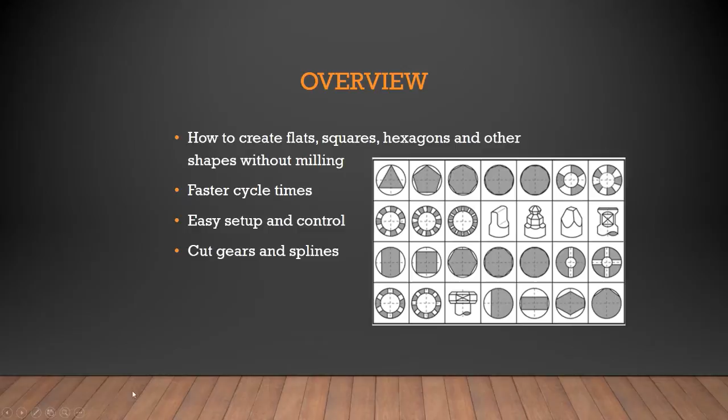And kind of a polygon turning 101: the things you want to start with is, number one, you've got to realize that the best ratio for polygon turning is a 2-to-1. That means the live tool is running twice the RPM of the main or sub spindle, synchronized together. So in other words, you have the live tool running, say, at 1,000 RPM. And when you go into this mode with the 2-to-1 ratio, the main spindle then would turn only at 500 RPM.

Number two, what you want to do is be sure to select a polygon cutter that is made especially for polygon turning. There are many manufacturers out there that are providing polygon turning tools, and we'll get into that in just a moment. Number three is the program, and in the program what we want to do is program the surface feet per minute and the feed similar to finish turning.

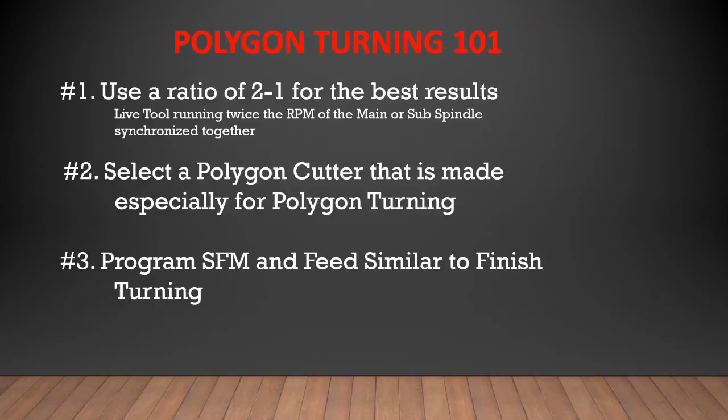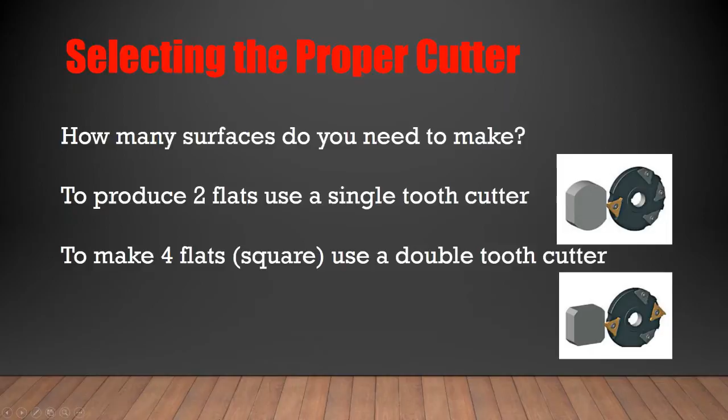So in selecting the proper cutter, first we need to know how many surfaces we need to make. So if you look over here, to make 2 flats, we would use a single tooth cutter as shown here. To make 4 flats, we would use a double tooth cutter. And remember, this is with a 2-to-1 ratio. To make a 6-sided hexagon, we would use a 3-insert cutter. And by the way, all Eurotech machines are equipped with the polygon turning function as standard. So the most common or widely used polygon turning is making hexes.

Over the last, I'd say, 10 to 15 years, there's been a big move over to this, especially in the areas where people are doing things like connectors. A lot of connectors will have a hexagon in the middle of the part, let's say. So the old-fashioned way is that we would throw in hex stock or purchase hex stock and then turn the majority of that hex stock away just to leave a hex in the middle of the part. So now with polygon turning, more and more people are getting away from that method and going to round stock, which runs much better in 12-foot bar feeders. And probably most of you already have gone through that.

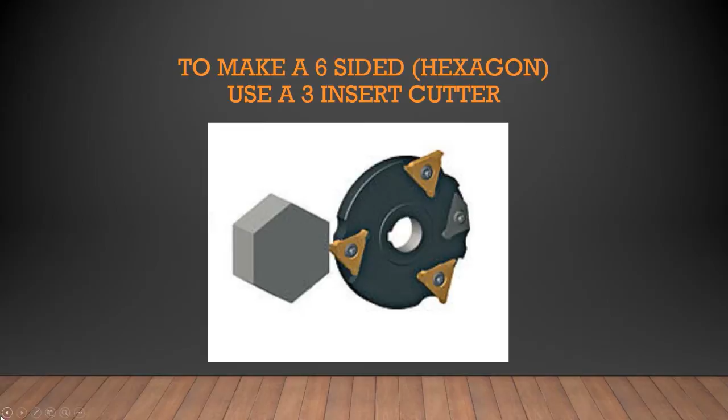And not only does it run smoother, but in some materials, round stock is less money than hex stock. And by running the round stock, we remove the material we need, and then we just come in, say, in the middle of the part where we need to make the hex, and we can use polygon turning to do that. So it's a valuable resource or function to have on a machine.

There are many good suppliers of polygon cutters, as I said before. One of the manufacturers available here in the U.S. is P.H. Horn. We also represent M.T. Marchetti. They also provide polygon cutters. There's a German company, Dieterle, and Schwanog, also another German company. All these companies are represented here in the United States.

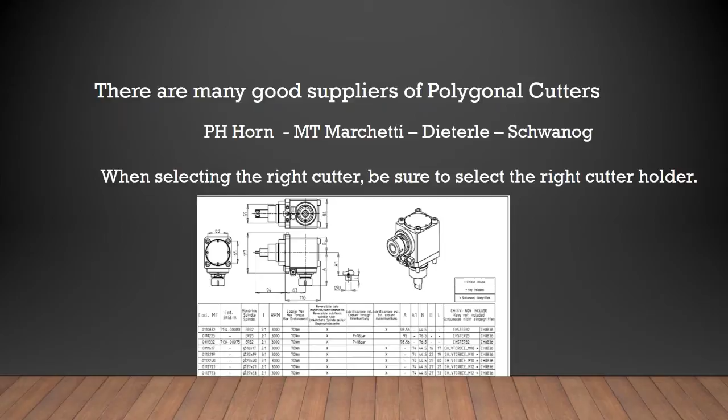But also remember that the cutter is one component. The other component is the actual live tool to do this type of polygon or successful polygon turning. Now, can a regular live tool, say a Z-axis live tool, be utilized? Yes, it can. However, this one that's shown here is a specially designed polygon cutter, and it's a little bit more heavy duty than your standard Z-axis live tool. So it's especially designed for polygon cutting, and that's the one we would actually recommend.

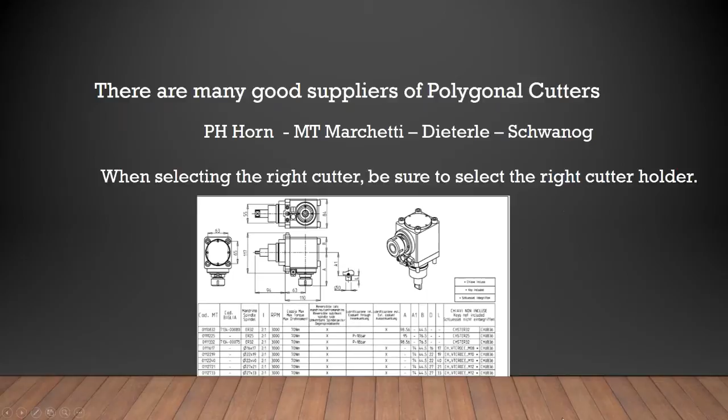So obviously, we have two sides of the coin here in successful polygon turning. We have the setup, the selection of the tools, etc., and then we have the programming. So the setup is also very, very important. Number one, we need to select the proper cutter and mount that assembly into the turret.

Now, the inserts need to be checked at least once with an indicator to make sure that each insert is at the same height. That's important because if you don't do that on these cutters, if you have an insert that's slightly out or protruding a little bit further than the others, then what are you going to get? You're going to get an uneven hex. If you measure across the flats, you could end up with some different sizes, and you don't want that. You want your hex to come out as perfect as you can. Also, it will help in the cutting.

The other thing is, realize on your setup, you're going to offset this polygon cutter off of one of those inserts the same as you would do a turning tool. So just pretend that that cutter is a turning tool, and you're going to offset it either with your probe or manually, however you do your offsets. If you're going to use the probe, bring the probe out and then rotate the cutter so that the insert can come in and touch off and take your offset there.

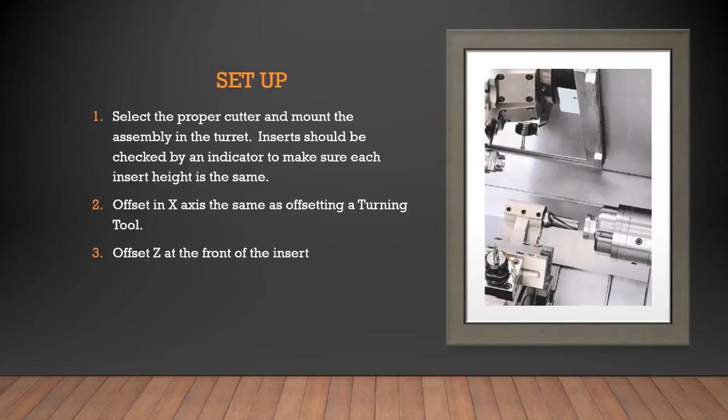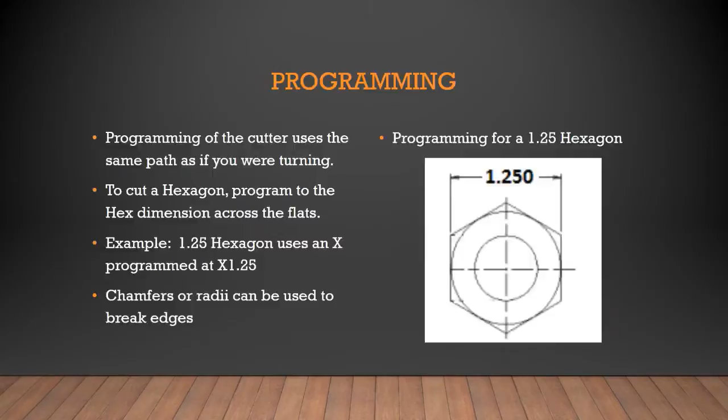Then number three, you're going to offset the Z to the front of the insert, because remember, you're going to treat this polygon cutter like a turning tool. Now here's what the program will look like. What I've chosen here is a 1 1/4 hex. So to program a 1 1/4 hex, this would be the format. We start off with a tool call, our work coordinate, coolant on, easy stuff, right?

Then first thing I'm going to do is call up the live tool. In this example, we're going to call up the live tool at 1,000 RPM, counterclockwise direction, and P13. Now this example is for one of our single turret machines. For a double turret or triple turret, that P number would just be different. For instance, on a Trofeo, that P would be P12 instead of P13. So we start the live tool at 1,000 RPM, and next we start up the main spindle at 500 RPM, also counterclockwise direction, P11.

Then the code comes into place. We're going to now command the polygon turning function, and that code is G251. The P1 is what we call declared. So every time you call the G251, you're going to automatically put in a P1. Don't forget that. It's necessary, but it's always going to be P1. And then the Q value is the ratio that you need. We said the ratio we want to use is a 2-to-1 ratio, so the Q is going to be 2. And the R value we have here is R0.

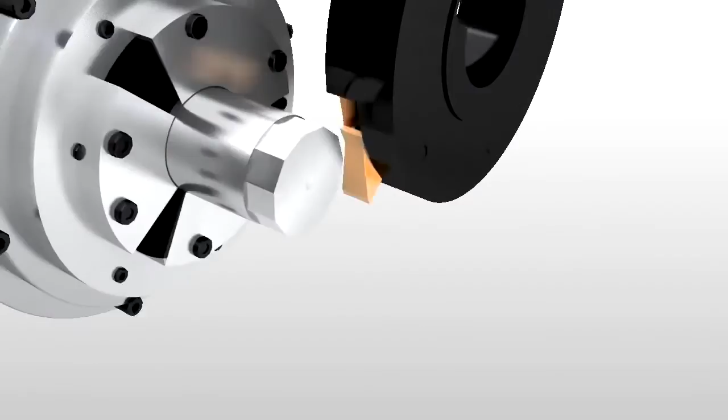Here's some notes. If you're programming for the 2-turret or 3-turret machines, like I said earlier, you're simply going to add an H1 for head 1 or channel 1 for the main spindle, and H2 or channel 2 for the sub spindle. Okay. And number 2, always check your live tool direction to ensure the proper use of the M3 or M4. Make sure the live tool you're using is rotating that cutter the correct way.

Many of you already know that with live tools, the first thing you want to do when you get a new live tool in is check the direction of that tool, because M3 is not necessarily always going to be rotating in a counterclockwise direction. It depends on the way that live tool was geared. So be careful, use a little caution there.

Number 3, once the G251 has been executed, once you're in the polygon turning mode, do not press the feed hold during the cut, as this could damage the live tool unit or the tool itself. So you don't want to do that. You don't want to damage a very expensive tool nor a very expensive live tool.

So if something goes wrong during that process, you're better off just letting it go and finish all the way to the G250, because pressing feed hold would cause a worse situation. Also, the live tool should never be programmed above 3,000 RPM. Okay, so there's a limit on the polygon rotation of the live tool, and that is 3,000 RPM.

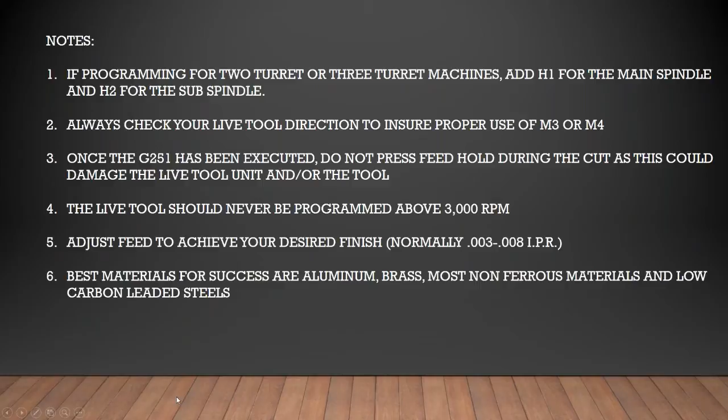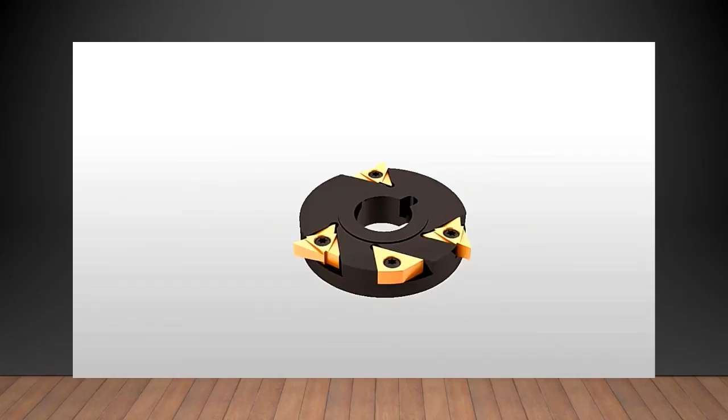You know what? I'm going to go back to that graphic here for a minute, if I can get the mouse to cooperate. Let's go back. I'm going to go ahead and play this again. That's the cutter. You notice this cutter's got 4 inserts in it. That one's from Schwanog, I think. This video is provided by Schwanog. And here you see it cutting the hex.

And here's what I wanted you to really focus on and see. See how that's coming over? And again, it'll show it again. 1, 2. Okay.

Oh, hang on here, somebody just asked what was the extra non-cutting insert for. That's a good question. Let me show you something else here, and then maybe I can explain a little bit better. That extra insert, that particular cutter from Schwanog that was displayed there, is where you can switch from using one cutting edge, one insert, or two inserts, or three inserts, and I think that's it on that particular one.

So you can pocket, if you looked at that cutter, let me go back again. I'm having trouble with this mouse. Oh, there it is. Okay. So I don't know if you can see this, but you've got one insert. Well, these are the different pockets. You got 1, 2, 3, 4 pockets.